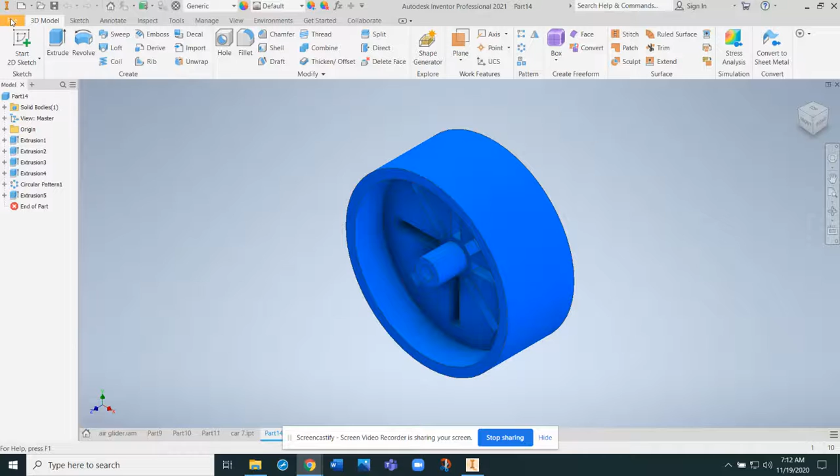Okay, we're going to start with a rear wheel for the dragster. We're going to click on Part, New Part, Standard Part, XY Plane.

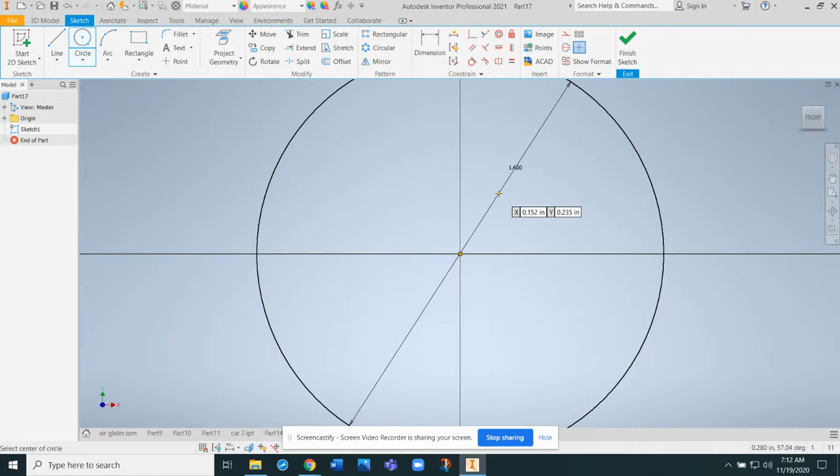We're going to make a circle from the center, and make that 1.6. Finish your sketch. Extrude, and let's make this 0.7, 7/10 of an inch.

Okay, start a new sketch again. Click on the surface. Let's make a small circle, 25/100. Make another one from the same place. Let's go to approximately 1.4. Finish your sketch.

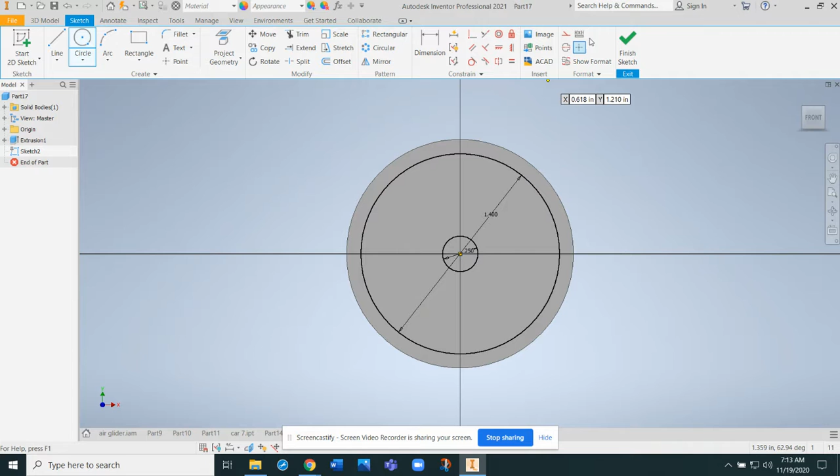Extrude. We're going to cut, but not going to cut all the way through this time. We're only going to cut through 3/10. Click on the cut button. Click inside the two circles. Click OK.

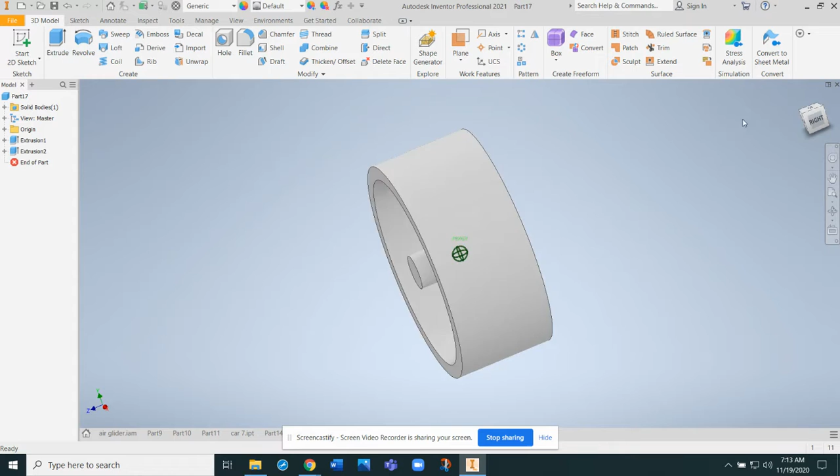We're going to flip it around, do the same thing to the back. Now, if you start here, you'll see the other circle from the other side pops up, so we just have to drag to the first circle that we drew on the other side. Same thing with the second one. Finish your sketch. Extrude. And cut 3/10 in.

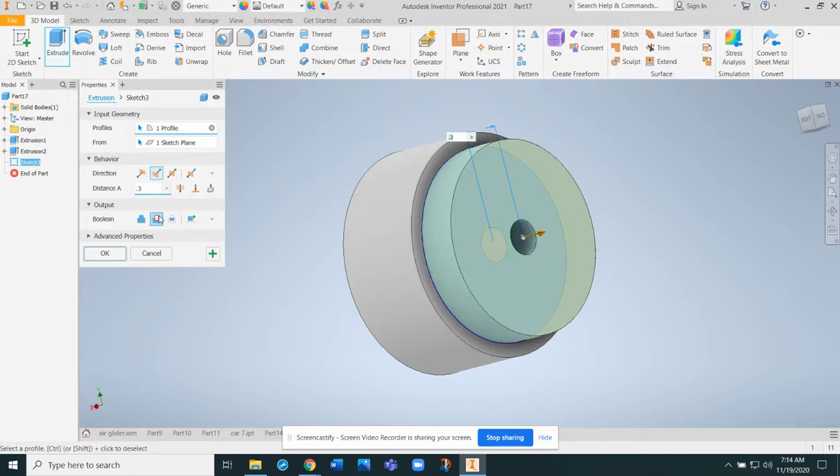All right, now we need to put a hole in the center for the axle. So we're going to create another sketch. This time the circle will be 1/8 of an inch, so 0.125. And we're going to finish our sketch. This time we're going to cut it all the way through.

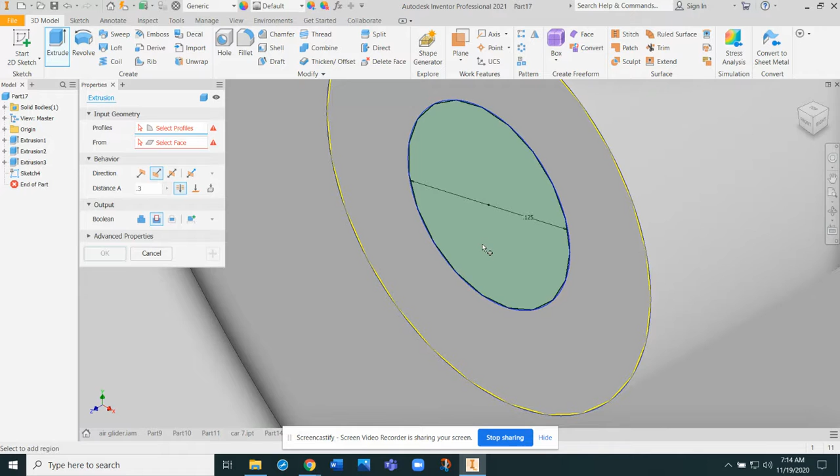So we're going to zoom in and click on that circle we just created. Now we should have a hole all the way through. All right, it's going to give us some character, and this is where you can do your own thing.

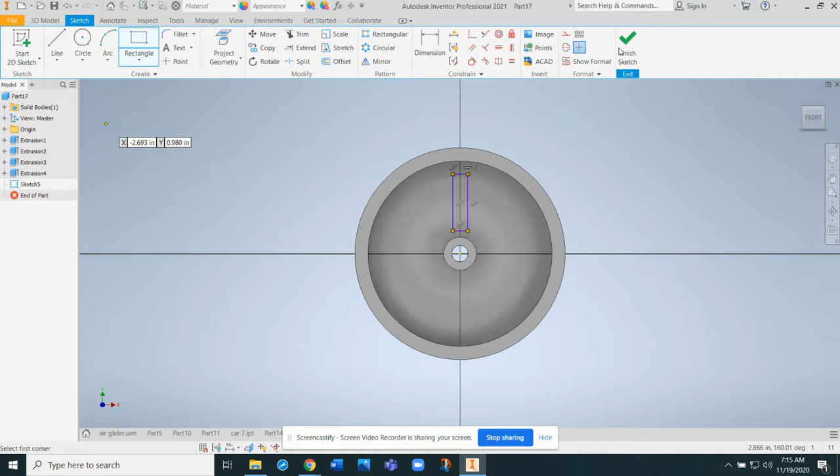Let's create a new sketch on the inside here. I'm going to make a simple rectangle. You can do a spline, line, all kinds of triangle shapes, polygons, whatever you'd like to do. Finish your sketch. We're going to cut all the way through.

And we're going to pattern this in a circle, up here, where you see a little circle pattern tool. We're going to click only on that rectangle I just created. Can't get it, zoom in. Sometimes it'd be a little tricky.

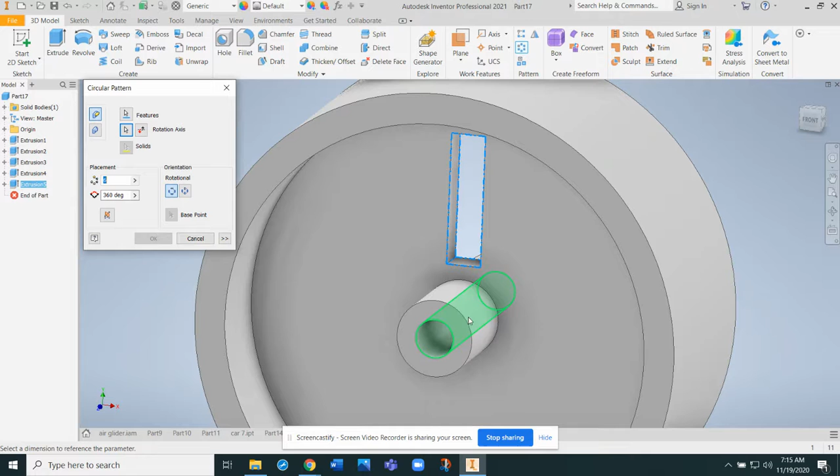All right, we're going to pattern that around this center. You can click how many times you want that to repeat. I'm going to leave it at 6. And now we have some design for it. Makes it look a little sharper than it was.

All right, let's color it and save it. Remember, drag from the right to the left. Let's just make them maybe a black color. Click OK.

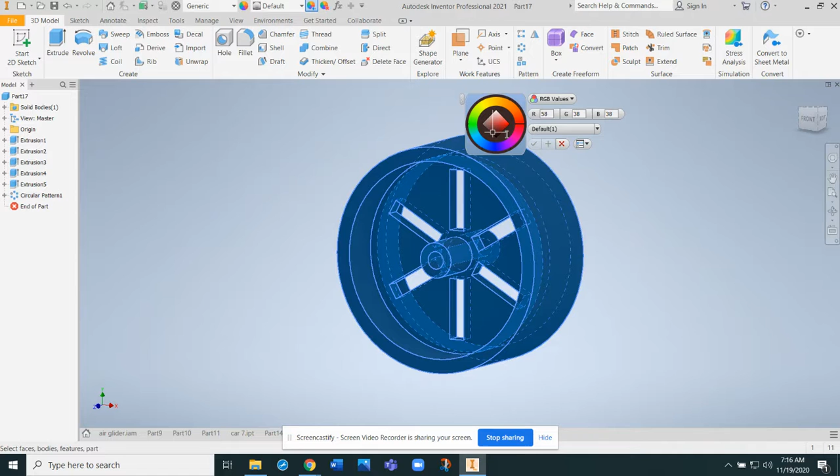Okay. Click OK. We're going to go to File, Save As. Make sure we're in the dragster folder. We'll call this a rear wheel. Or you can call it the big wheel. Let's call it the big wheel.

And I've already got some name that. We'll call it Big Wheel 3. Okay, next time we'll make the little wheel.